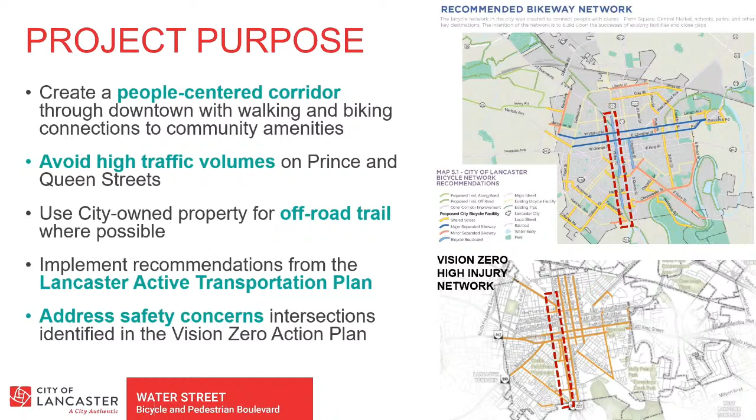So we're going to be talking a lot tonight about bicycle boulevards. How can Water Street be transformed into a bicycle boulevard? But first of all, what is a bicycle boulevard? It's basically a slower moving street where you keep traffic volumes pretty low. You keep them slow. Usually you want to be under 25 miles per hour, ideally 20 miles per hour. And bikers are intended to have more of a priority on that.

You're not taking away any vehicular travel lanes. You're not taking away parking. So the vehicles continue to use Water Street as they do today. However, they do so more slowly, and you really focus on creating safer crossings to facilitate those bicycle movements on the boulevard.

In addition to the traffic calming, a key part of bicycle boulevards is signage, right? You want to have signs that are alerting people that bicycles are going to be on the road, alerting people to crossings that are coming up, and then also using pavement markings. And you'll be able to see those on the plan views that are both here on the table and on the boards.

So the study area for the Water Street corridor is from Fairview Avenue to the north to Harrisburg Avenue to the south. Throughout the corridor, Water Street is typically 25 feet wide with two 9-foot travel lanes, one in each direction, and one parking lane on the west side of the street. The posted speed is 25 miles per hour. And as I noted, we do have 3 intersections on the corridor that were identified as high crash locations on the Vision Zero Action Plan.

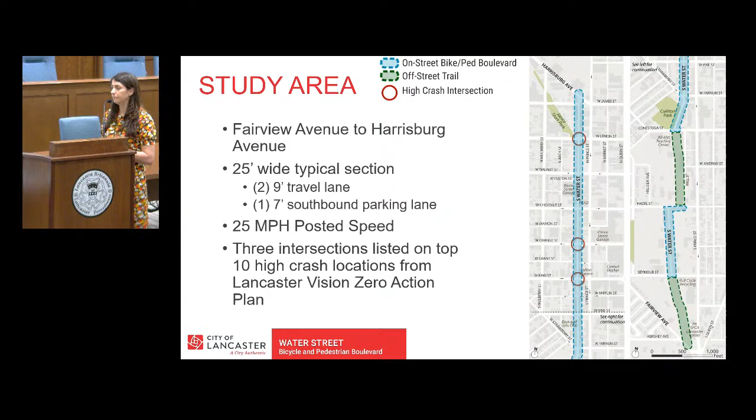A quick overview, as I mentioned, we already did a concept design and planning phase for this project. Some of you may have participated in some of the public meetings that we had as part of that concept design. So that was phase 1, and that took place from the winter of 2019 through the fall of 2019. We moved into phase 2, preliminary design, which is what we are presenting on here tonight, in fall of 2020, and we'll be continuing to work on preliminary design through summer of 2022.

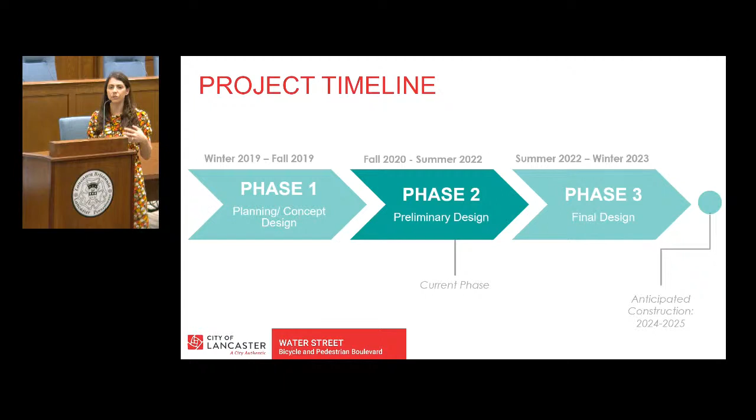At that point, we will switch into final design, where we go into even more detail on the designs that we're doing to prepare all of our construction plans, and we are aiming to go to construction of the project probably in 2024, with construction in 2024 and 2025.

For the project vision and goals, as I mentioned, we really want this to be a people-centered corridor where people of all ages and abilities can travel comfortably throughout the corridor. So that's for people walking, that's for people biking, and it's also creating safer conditions for vehicular traffic as well. Some of the goals that we want to achieve through implementation of this project is creating that low-speed environment, actually lowering the speed limit to 20 miles per hour instead of 25.

I mentioned the Vision Zero plan, and the goal of Vision Zero is to get to 0 traffic deaths. The biggest indicator of whether you're going to have a severe injury or a death from a traffic incident is speed. The lower the speeds are, the more likely that you are to be able to walk away from that. And that is why we want to keep speeds as low as possible on the Water Street corridor to create that safe, comfortable environment for all users.

We also want to increase the number of people walking and biking, reduce the number of crashes for all modes of travel, and we also want to look at ways to incorporate green infrastructure along the corridor. This would be similar to the green infrastructure that the city is already doing on corridors such as Mulberry and Charlotte.

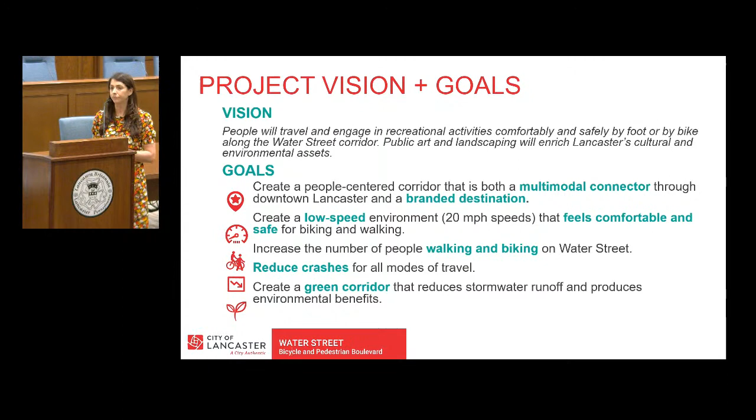Some of the key issues that we noted along the corridor during our existing conditions analysis is that it's a very constrained right-of-way, right? There's not extra space here in the road that you can put in a bike lane or anything like that. The lanes are already narrow, the parking lane is narrow, and so we have a limited amount of space to deal with.

Similarly with the sidewalks. In an ideal world, we'd have much wider sidewalks to facilitate pedestrian movement. However, the corridor itself is too constrained to widen out those sidewalks without impacting vehicular operations, which, as we know, this still needs to be a corridor that cars can travel in both directions and you still have your parking.

Throughout the corridor, we have a lack of signalized intersections and the crossings aren't overly well marked, so that can make it problematic for people crossing the street. There are also numerous driveways in areas that can create more conflicts. And especially in the southern part of the corridor, where we do have those sections where the road does not go through and we have trails, there are some light industrial uses in that area. So we need to think about how bicycle and pedestrian traffic is going to interact with those industrial uses.

Finally, similar to the industrial, we recognize that this is a corridor that trucks use. So any of the things that we're doing at the intersections along the corridor need to be able to accommodate truck turns. So that's something that we took into consideration during our design.

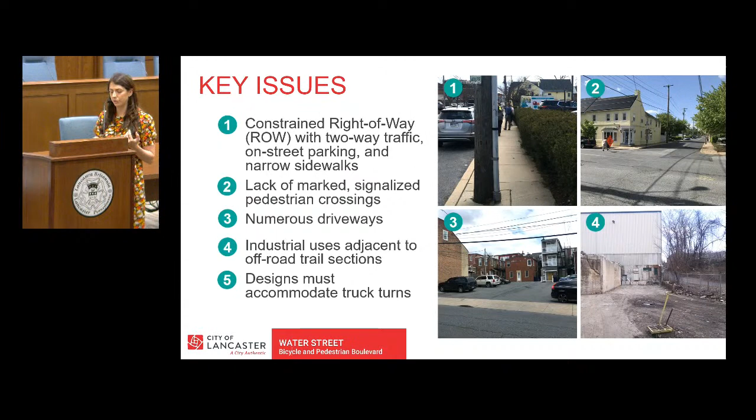As I mentioned, during phase one, we had a couple of public activities to try to get feedback and get input on the concept designs that we were considering. The first of these took place in May of 2019 at the Lancaster Open Streets event. That year, Open Streets was on the Water Street corridor, so I don't know if any of you came to our booth, but we had corridor plans laid out where we were asking people for input on what they'd like to see. We had a toolbox of the different treatments we were looking at and some of the concepts for intersection design.

We then had a public meeting in September of 2019, which took place at the Boys and Girls Club on the Water Street corridor, where we gave a presentation on the design and had boards and got some feedback there, and overall received very positive feedback on the design. Some of the things that we heard about were concerns about lighting and trail safety, and of course making sure that vehicular operations could continue on the corridor.

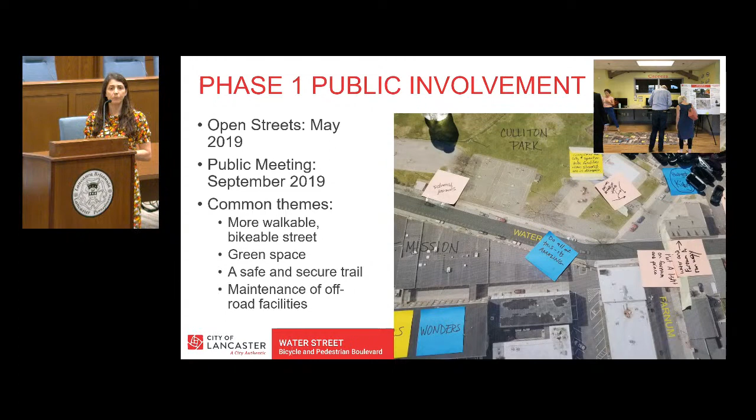What came out of phase one is we identified a toolkit of treatments. I'm going to go over these briefly right now because we're going to be discussing these concepts throughout the rest of the presentation. So as I noted, we recognize that the typical section of Water Street with its 2 lanes and its parking lanes needs to stay consistent in the design of the boulevard. So where we're looking at treatments mostly are at intersections. We're looking at things like high visibility crosswalks. It's going to make it safer for pedestrians to cross.

In some cases, we're looking at raised crosswalks to slow traffic down even more as they're making those crossings. We also have a location where we're looking at a raised intersection. That's where the entire intersection is raised up to sidewalk level. So the entire intersection almost serves as a speed hump and slows cars down as they're moving through the intersection.

We're also looking at curb bump outs. Curb bump outs basically take place wherever you have a parking lane at the corner where parking is illegal anyway because you can't park within 20 feet of the intersection. The sidewalk can then bump out into that lane, and that shortens the crossing distance. That makes it so much safer for pedestrians to cross because they have less amount of space if they're in the road making that crossing. Those curb bump outs also provide opportunities for the green infrastructure that I mentioned earlier, and we'll be showing you some images of what those can look like.

All the things that I just mentioned are things that are happening at intersections. On the corridor itself, in between intersections, we are looking at speed humps to slow traffic down. I mentioned that we want to keep things at that 20 miles per hour to keep it as safe as possible, so those are being installed as well.

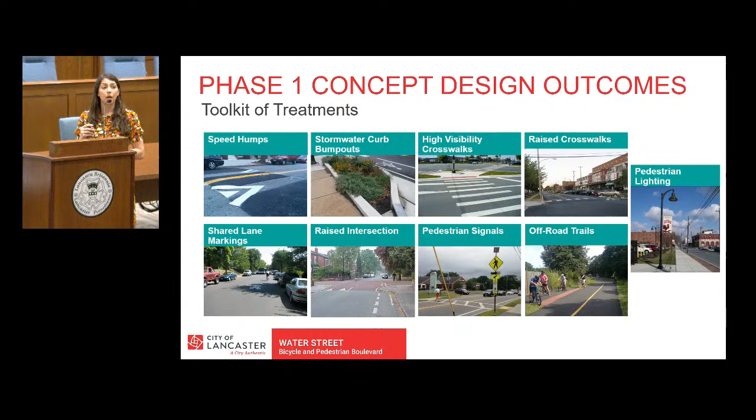And then the other thing that came out of concept design is we developed a series of intersection plans and renderings to give folks a sense of what this would look like. And I wanted to show these here because now that we're in preliminary design, we have very detailed designs at this point, but they don't look quite as pretty as the concept design ones. So I wanted to give you a sense of what those looked like at that time.

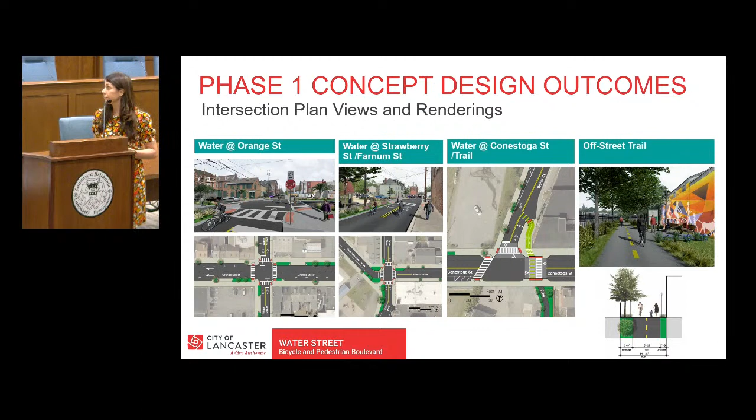We've since refined these drawings to make sure that they're buildable. They work with the utilities that are underground. They work with truck turning. But this gives you a sense of how the corridor was originally envisioned when we were in the concept design phase. So with that, I am going to hand it off to Eric and Anna to talk us through some updates on the environmental process for the project.

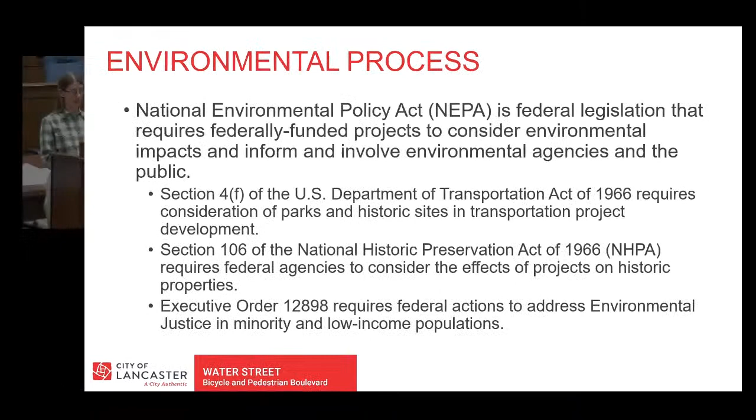Because this project does include federal funding, it falls under the National Environmental Policy Act, which is known as NEPA. And there are three particular components of that I'd like to speak about tonight. One of them is Section 4(f) of the U.S. Department of Transportation Act of 1966. This requires that parks and historic sites be considered in transportation project development.

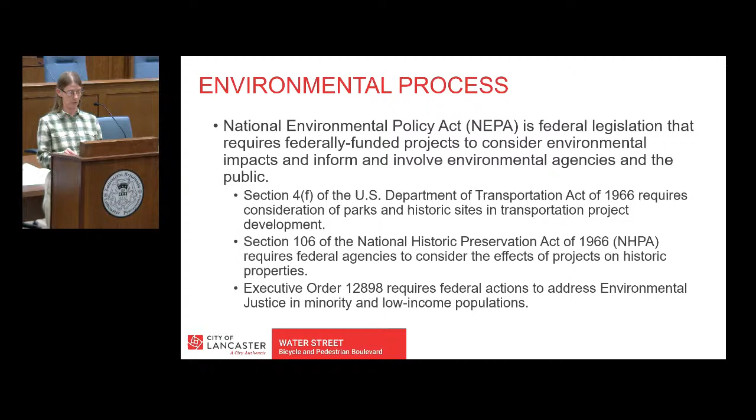There's also Section 106 of the National Historic Preservation Act of 1966, the NHPA. That requires that federal agencies consider the effects of projects on historic properties. There's a little bit of overlap between the two. There's also Executive Order 12898, which requires federal actions to address environmental justice in minority and low-income populations.

For parks, we have 3 parks in the project area. At the very northern end, we have Rotary Park. Approximately 1 block below that, we have Mayor Janice C. Stork Corridor Park. And then approximately halfway through, we have Culliton Park. A Section 4(f) de minimis finding may be needed for the work in the parks.

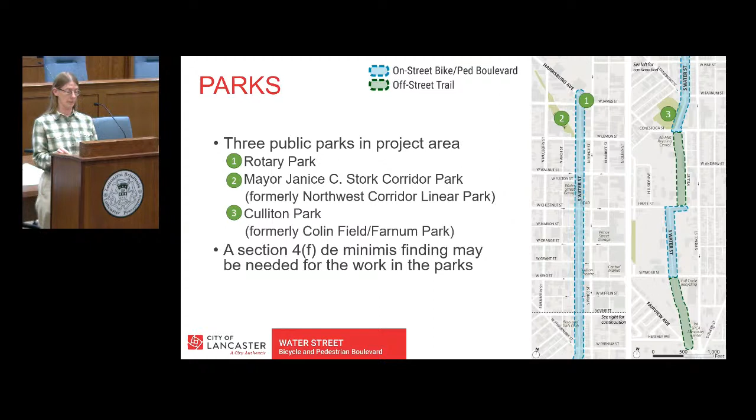For the Mayor Janice C. Stork Corridor Park, we have also approximately 215 square feet of temporary impact. There will be a replacement of the sidewalk and the apron at the park entrance that is shown in the photograph. In the general area, we're planning curb bulb-outs, curb ramps, and stormwater management. Temporary impact to be approximately 1 month, and other access to the park will remain open. The park itself will, of course, also remain open.

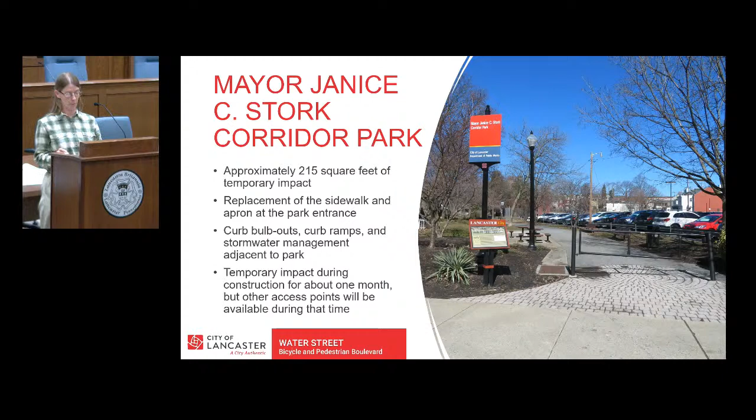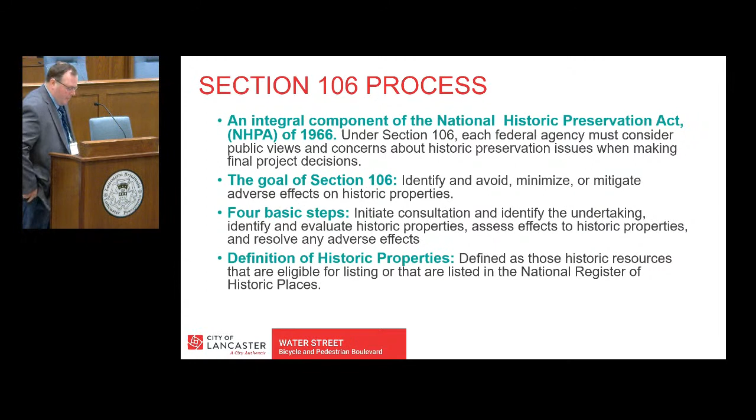Good turnout this evening. Again, we're working on the environmental clearance for this project. And because there's federal funding involved with that, we have to comply with NEPA, as Anna said. And as you're aware, we're within the Lancaster City Historic District, which is listed on the National Register of Historic Places. So the entire 1.6 mile trail is within that project area, and we basically have to assess the impacts to that. So the goal of that is to identify what's there. We know the resources there, and then avoid impacts to that resource. And the project team has done a really good job to do that for this corridor.

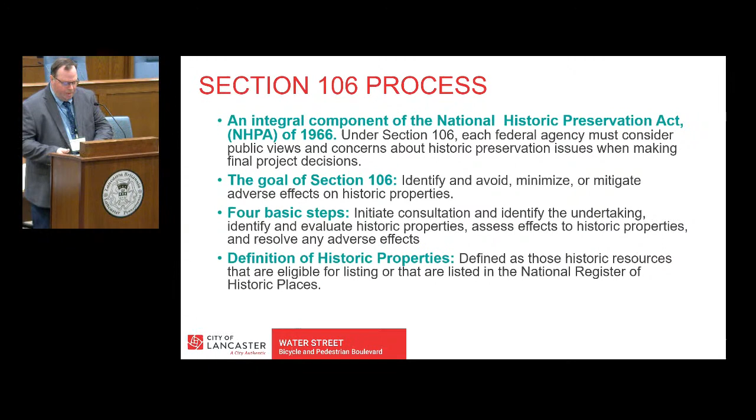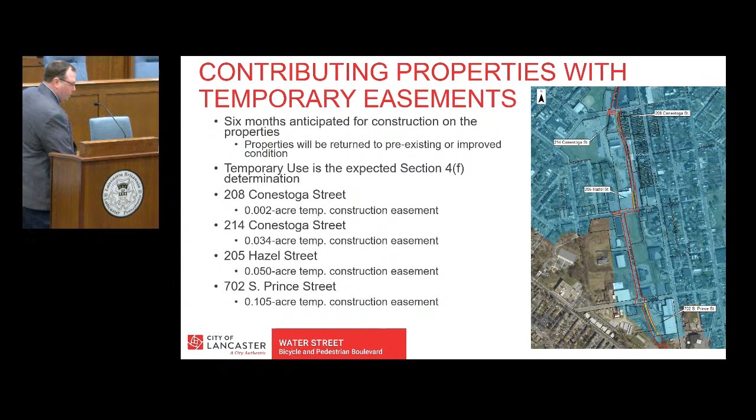And there's properties within the historic district that are listed on the National Register of Historic Places, and we identify those as either contributing or non-contributing to the historic district. So there's 4 properties within the historic district that we're having temporary construction easements to. They are listed here in front of us, being the 208 Conestoga Street, the 214 Conestoga Street, the 205 Hazel Street properties, and the 702 South Prince Street properties.

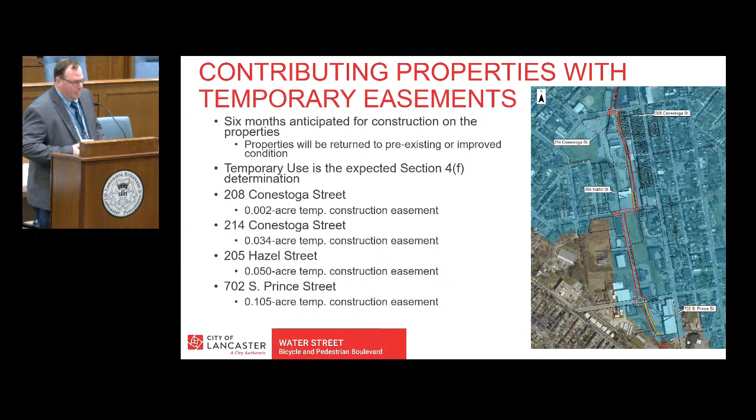We can go over the details with exactly what we're doing there when we're going through the boards this evening. But basically, there'll be temporary construction easements on there for the contractor to access the curb ramp improvements during construction. So, important to note is that this project will have no effect on the historic properties. So, that's basically what we're looking to achieve for cultural clearance for the project.

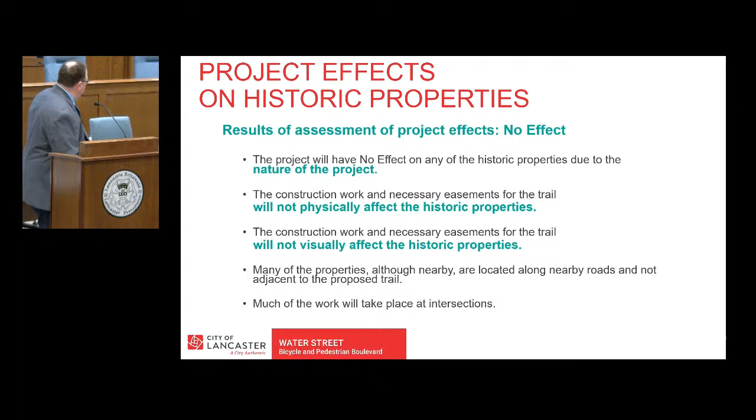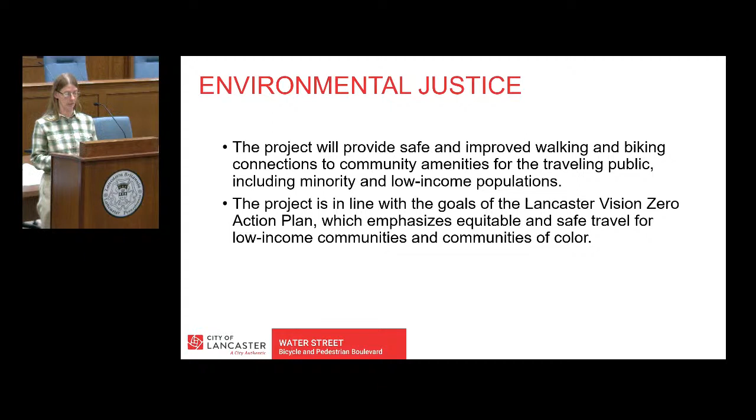My turn again, thank you.

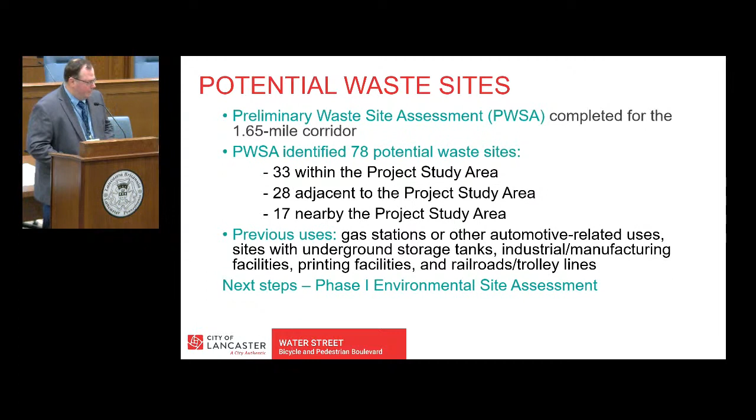All right, thank you, Eric and Anna. We call them the Environmental Dream Team.

All right, so I know that I already talked a little bit about some of the components of the corridor that were identified during the concept design phase. And right now, I wanted to talk to you about where the design stands in preliminary design, and just to give you an update on what exactly we are looking at.

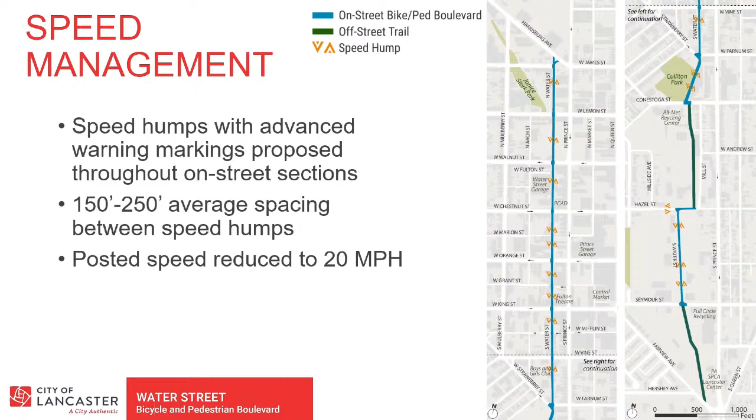So I mentioned a lot about speed and trying to keep speed low. So speed humps will be installed throughout the corridor. Typically, we are looking for these speed humps to be installed about every 150 to 250 feet or so. We've found that spacing will actually ensure that speed compliance happens. If you put the speed humps too far apart, people will just speed up in between them. So we keep them close enough together to keep those speeds low. We also will be reposting the speed limit from 25 miles per hour to 20 miles per hour along the corridor.

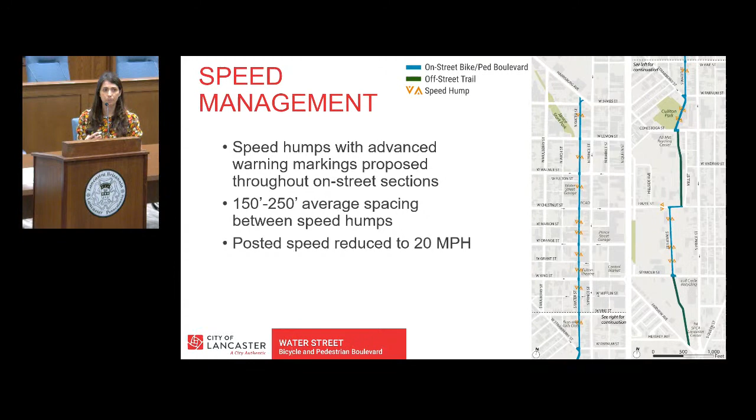We're also looking at things like bicycle crossings where since we know we're going to have bicycle traffic along the corridor, we want to mark in those bicycle crossings and put in those conflict markings so that vehicles and pedestrians are aware the bicycles are going to be there, as well as facilitating movements for the cyclists that are going from the Water Street corridor to other intersecting bicycle facilities, such as the existing facility on Walnut Street and the proposed bicycle facility on Lemon Street.

At 3 intersections, we have what we're calling enhanced trail crossings. These are locations where we're going to switch from on-road to off-road. So the majority of the corridor, as I mentioned, is going to be a bicycle boulevard. This is on the existing Water Street that you have today, and this is where the typical street section remains the same, with 2 lanes in each direction and 1 lane of parking.

For the 2 sections where Water Street does not extend through, so there's a gap in Water Street between Conestoga and Hazel, and there's also a gap between Seymour and Hershey. In those 2 areas where the city already owns a right-of-way, we will have an off-road trail in those sections. And we want to make sure that where bikes and pedestrians are moving in between the on-road and the off-road, that we have safe transitions for them.

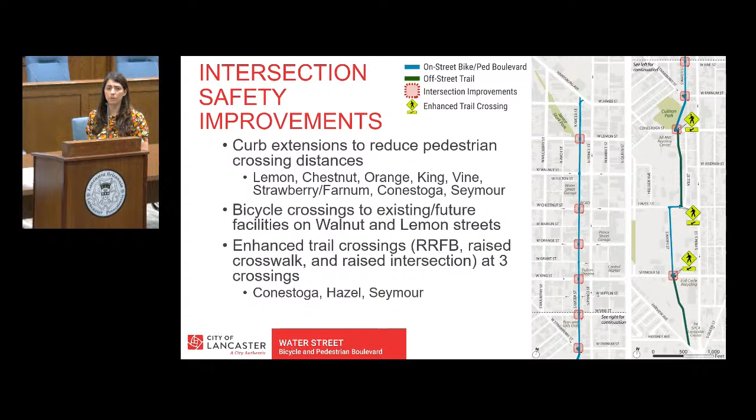So I just want to go through a couple conditions along the corridor. We don't have every intersection on here in the presentation, but if you want to look in any more detail at what's happening at each intersection, I encourage you to come and look at the plan views that we have on the table here, and the design team can answer any questions that you have.

First, I want to talk a little bit about what's happening at the northern terminus of the corridor with connections to James Street and Prince Street. So here on the plan view, you can see that we have bicycle markings that are connecting cyclists that are moving northbound on Water Street to connect onto James.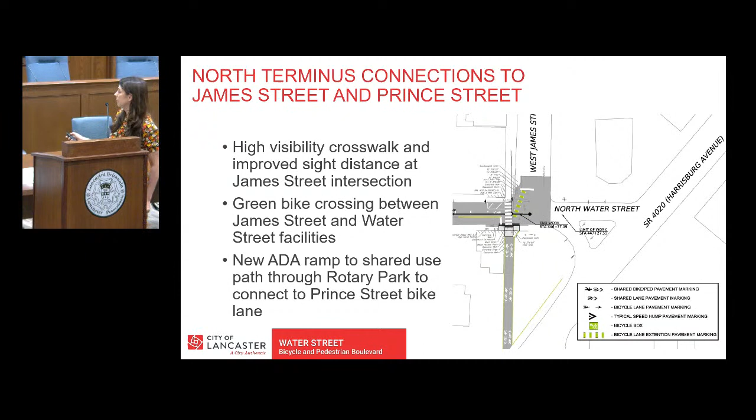We also are showing we're looking into doing pavement markings here on the side path that's going to connect cyclists and pedestrians going from Water Street over to the existing bike lanes on Prince Street, and this will also include a new ADA compliant ramp right here at the corner of Water Street. And we're also looking at a high visibility crosswalk at this crossing here.

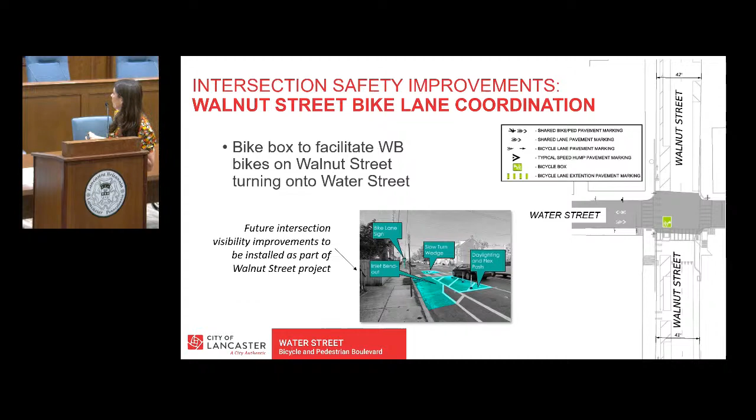The next intersection I want to talk about is Walnut Street. This is where the Water Street corridor will be existing with an existing bicycle facility. This is where we have a parking separated bike lane that's traveling in the westbound connection. And in this spot, most of the intersection treatments have already been constructed here, but we will be adding a green bike box that will allow cyclists that are traveling west on Walnut Street to wait here in the bike box before turning right to head north on the Water Street corridor.

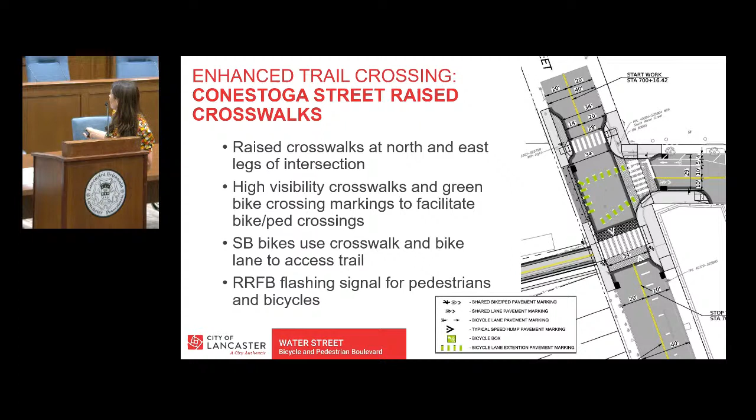If you're heading in the northbound direction, you cross at the raised intersection here, and for a cyclist, at some point, come down, use the conflict markings, and get onto the road in the northbound direction.

The other treatment that we're doing at this intersection is called a rectangular rapid flashing beacon, or an RRFB, which is a very fancy way of saying that is a signal that basically when a bicyclist or a pedestrian is detected, the signal will flash, alerting cars that they need to stop for the pedestrian or cyclist that is crossing Conestoga here to once again make that crossing as safe as possible.

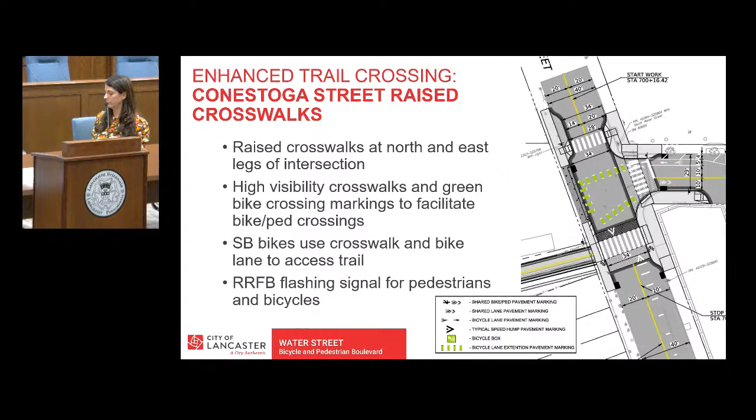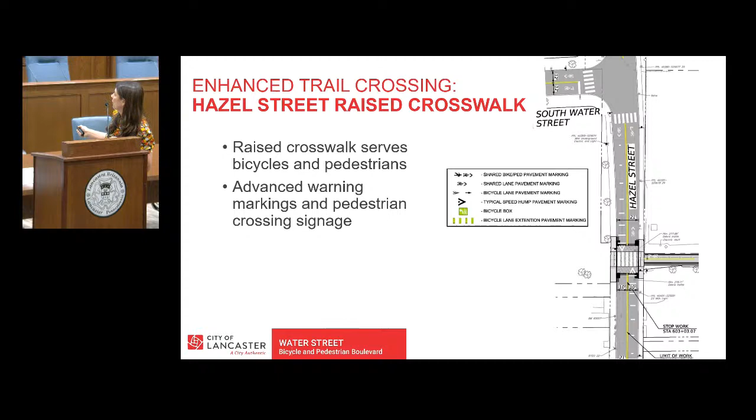Another intersection where we are doing this transition is at Hazel. So here to the north, the trail is coming down and basically dead-ending into Hazel. At Hazel, we have a raised crosswalk. So again, this is almost acting as a speed hump on Hazel. It's going to slow the traffic down as it approaches the crosswalk, makes that crosswalk more visible. And at this point, bikes would continue on road on Hazel Street and then turn onto Water Street, where Water Street extends between Hazel and Seymour.

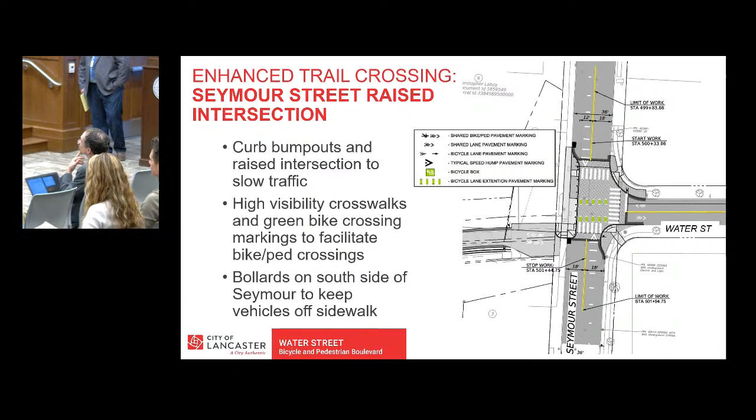So southbound bikes would follow this path here, cross the green conflict zones. At this point, they would be on the sidewalk level and they'd be able to access the trail. Similarly, northbound bikes are on the trail, so then they're all raised up. They use their green conflict marking here, and then they're on the roadway.

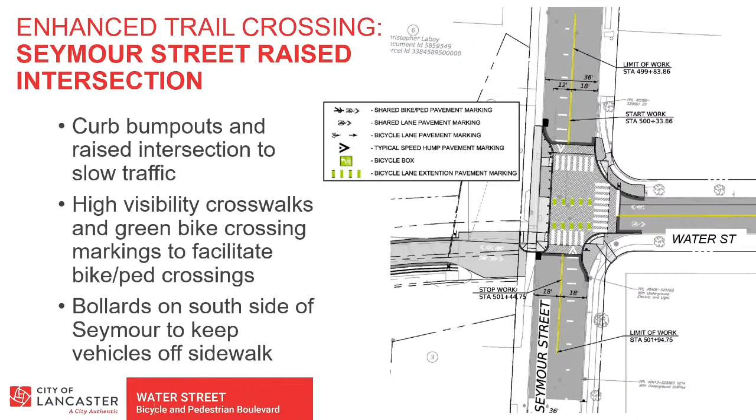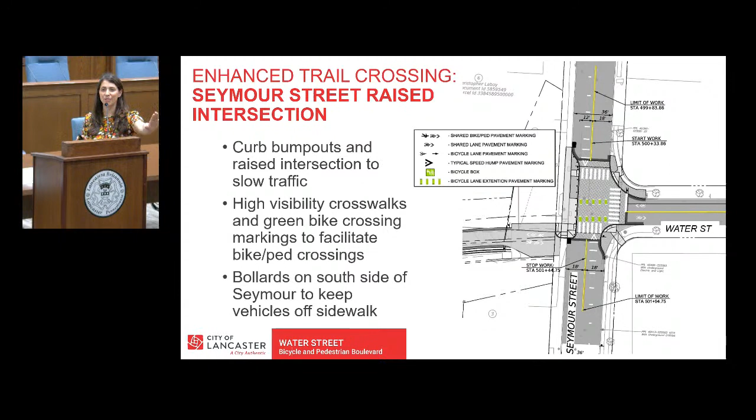In these areas, you can see these black dots here are denoting bollards that basically keep vehicles from going up on the sidewalk in that section. So if you have the cars up at sidewalk level, you want to make sure that they are not accessing the sidewalk. I know that there's a lot going on in these plan views. I really encourage you to check out this board back here after the presentation so you can look at those in more detail, and the design team can answer any questions that you have.

So with that, I'm going to hand it over to Sandy to talk a little bit about green infrastructure, both on road and on the trail.

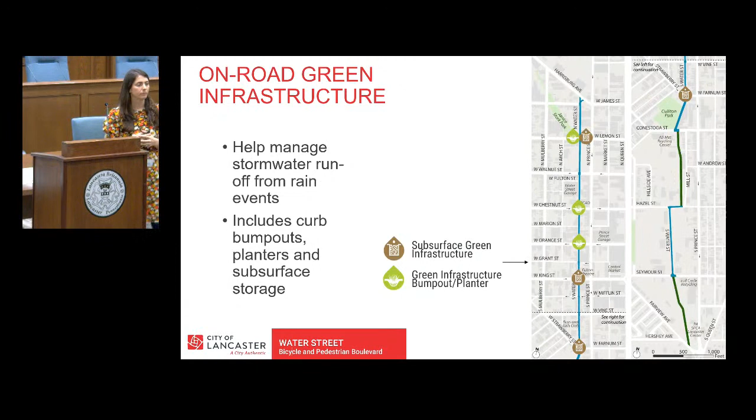Thank you, everyone, for coming out on a day like today. I'm glad to talk about stormwater when it's really, really coming down.

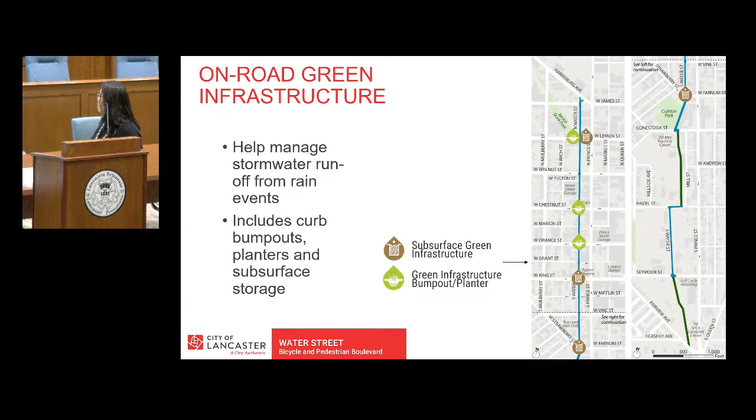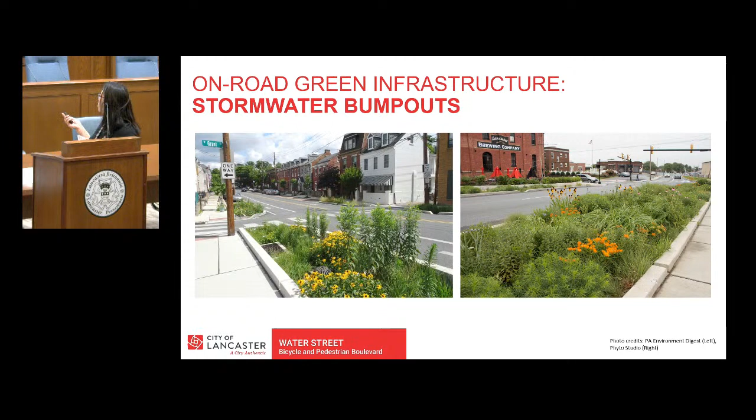So as Laura said, we've integrated stormwater infrastructure with the overall infrastructure improvements, and a lot of the systems are integrated at the curb extensions and bump outs. Most of you are probably extremely familiar with the bump outs that you see throughout the city. They essentially work by just filtering water that's coming in from the street. And again, a lot of these systems are just managing runoff on the street. So there's a couple of examples of bump outs in the city.

And in addition to the bump outs, this is another typology that we are trying to design. And again, they're stormwater planters. And the way these things are built is, essentially there's a surface expression, which is essentially the vegetated system, and then underneath there is a stone storage. Oh, I have to be really close. Okay.

So both the bump outs and the planters have a surface expression, which is the vegetated system that you see on the screen here, and a subsurface detention system, which is essentially either loose stones or, for lack of a better word, almost like milk crates. And the way they function is that they temporarily hold back stormwater that comes into the system, and then they release it slowly back into the storm sewer system.

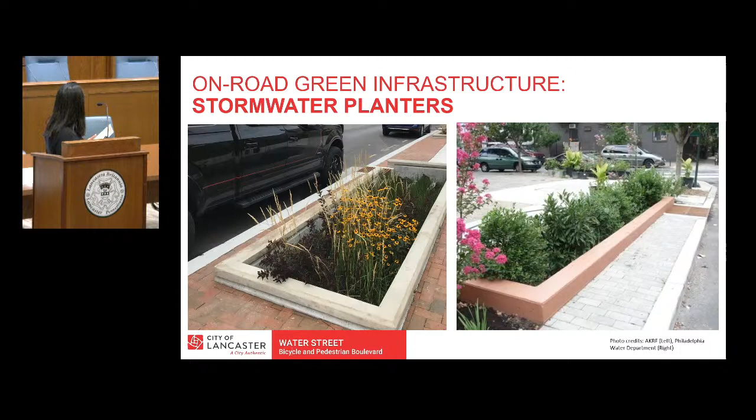And essentially, they function by not overwhelming any of the combined sewer system in the city. And for a city like Lancaster, where the stormwater infrastructure is aging, anything that we can do to aid that, I think, is a positive thing.

Again, you probably have seen the bump outs in the city, and there's a wide variety of plant materials that we can select from that are native to, I guess, sort of the eastern United States, and they also provide ancillary benefits like habitat for pollinators. And first and foremost, they're really beautiful to look at.

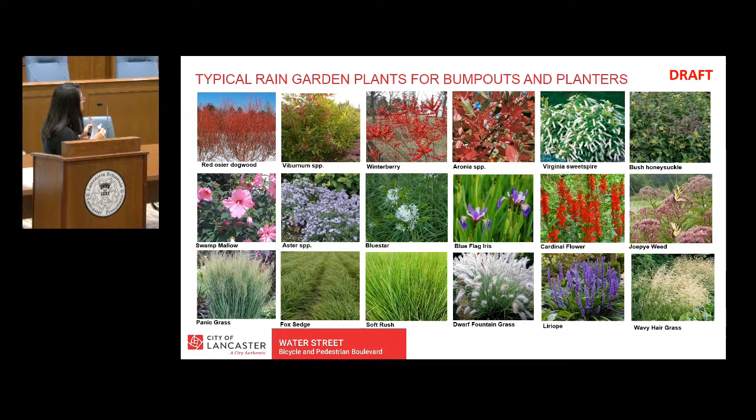But we're all mindful that these are living things that need to be maintained. So there's always that sort of balance between making things that are lush and beautiful, and at the same time, that can persistently look good. So that's sort of the dynamic that I, as a landscape architect, work with. And I want to bring Wayne to talk about the off-road trail sections, and specifically around the retaining wall that will be at Conestoga Street.

Thank you, Sandy. Wayne Martin, pleasure to be here. So I want to speak specifically on two components of this off-road trail portion. Most of what you heard was the on-street concepts, and then you heard a little bit about some off-road portions in the southern end of the Water Street divide. Those will be exclusive for bikes and peds, except for one little section where it's a shared use with a driveway facility. But there's two components, right?

Grade was one of the challenges we had to deal with. So how do you handle those grades? Retaining walls, obviously. Retaining walls can be very expensive. We're using your taxpayer dollars, so we have to come up with some feasible alternatives. So we did study two different alternatives for that retaining wall design, one being a gravity retaining wall, and the other being a modular block retaining wall.

Basically retaining walls are going to do two things. One, they're going to prevent sliding. They're going to prevent overturning. Modular block is approved by PennDOT on PennDOT highways. That was the selected alternative based on price and site constraints. The way it'll be constructed, these modular blocks don't use mortar like a mortar wall. They interlock, so they're prefabricated at a plant, hauled to the site, set in place.

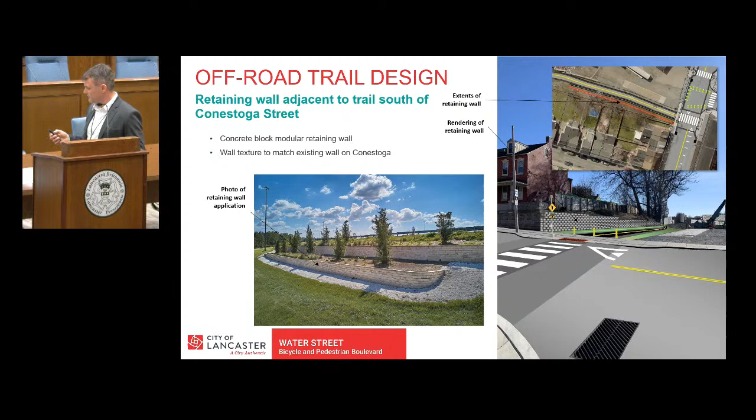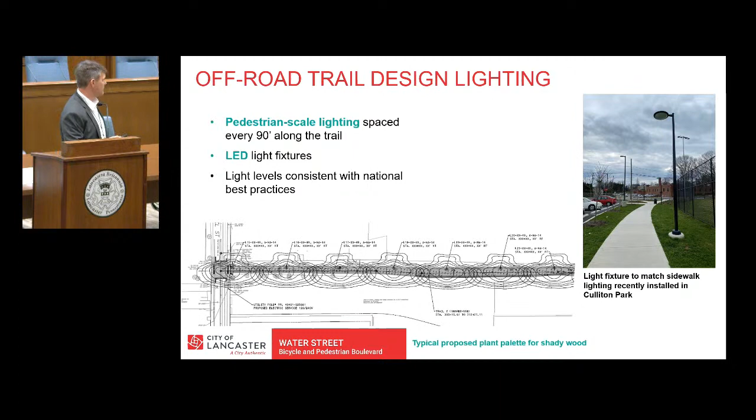The other thing I wanted to mention was the lighting design. The off-road trail portions will be lit. We used park level lighting, pedestrian level lighting, LED lights. The fixture that was selected is based upon a fixture used in the City of Lancaster in some parks. Not much to say about it. It will be illuminated to the national best practices. And now I'll turn it back over to Sandy.

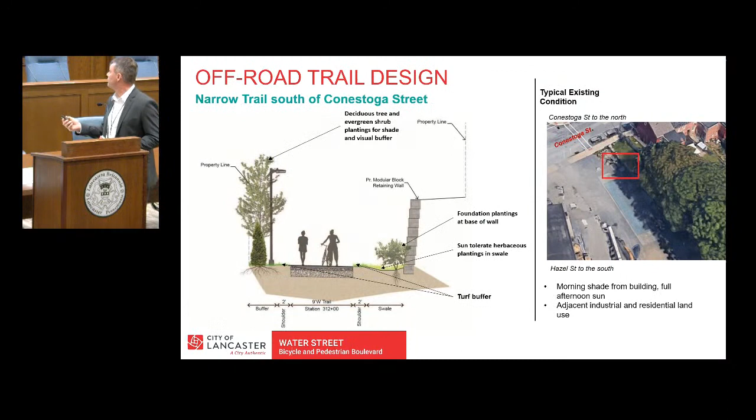So as Wayne said, the North Water Street trail, which is all the on-road section, is sort of governed by the street geometry, right? You have your intersections, whereas once you start going off-street, it's a different character. Sorry. So once you're on the off-trail sections, which there's actually 2 segments, it becomes a different experience altogether.

And so within this off-road section here, there's the wall that Wayne was talking about, as well as the landscaping and the stormwater. Most of the stormwater will be managed by a passive system. So basically, it's just a swale system that's running alongside one side of the trail.

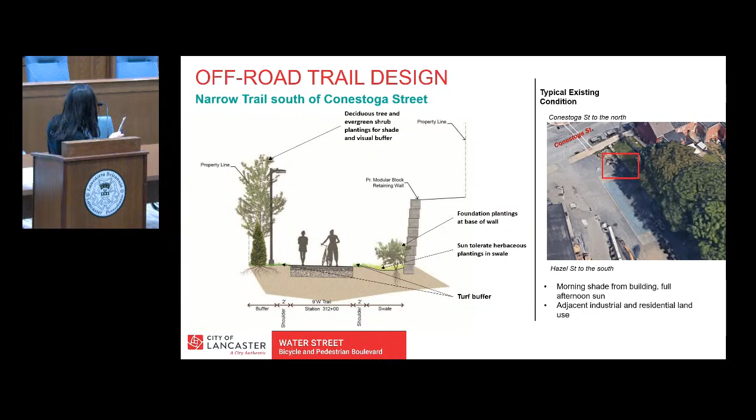And again, one of the things that we want to do in there is, we understand that it's a light industrial area. We do want to have some vegetation that will provide shade, and at the same time provide some screening. So these are some more columnar species of trees that we can possibly use to provide that screening, as well as to provide shade and habitat.

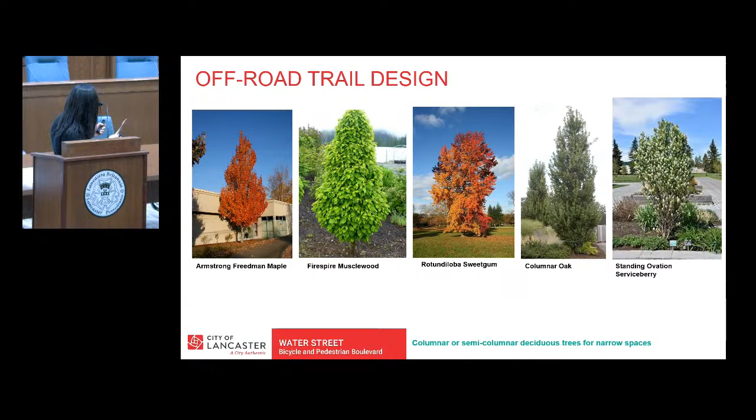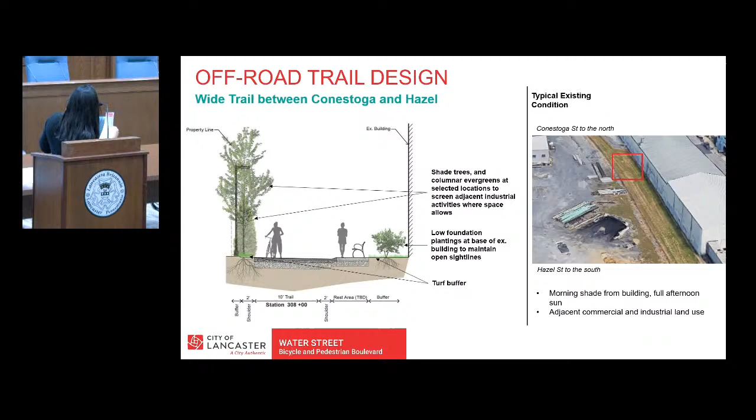So again, looking at different sections of the trail, and this is sort of between Hazel and Conestoga. I guess if you're coming down, it's to the left side. It's sort of a light industrial area. Again, we want to provide screening and possibly some rest areas as well through there. Again, more screening plants.

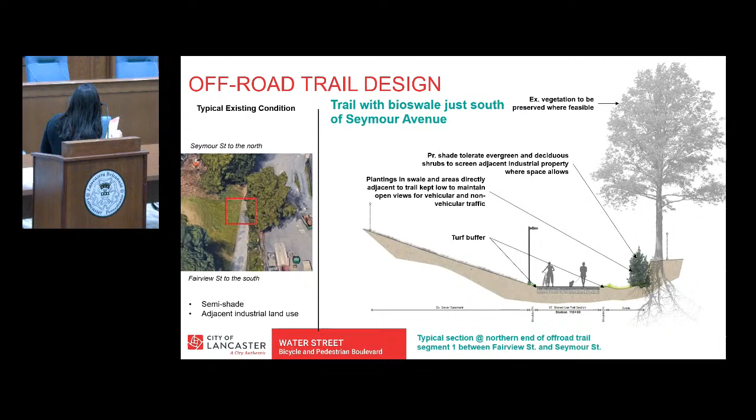And this is closer to Seymour, where I believe this is sort of like a shared use trail in this section. Just different types of vegetation to sort of enhance that trail experience.

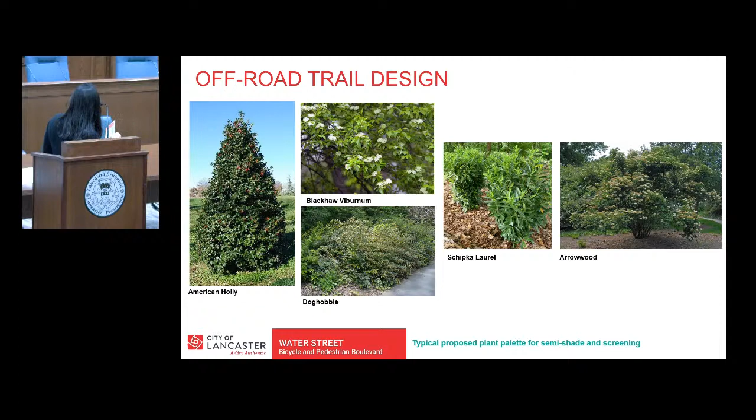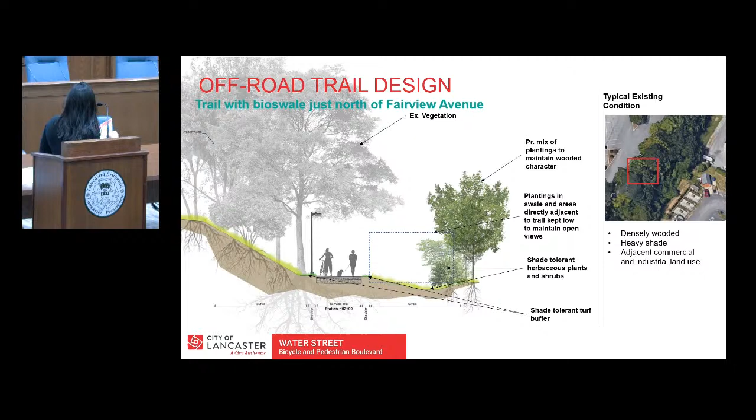And lastly, this is really when you're farther down, the south end of the trail, closer to Fairview. I believe there is the SPCA site that's close by. So again, it's making that balance between screening and still giving it a sense of place. Again, there's existing vegetation and cover all along the site that the plantings will have to respond to. So, again, more plants.

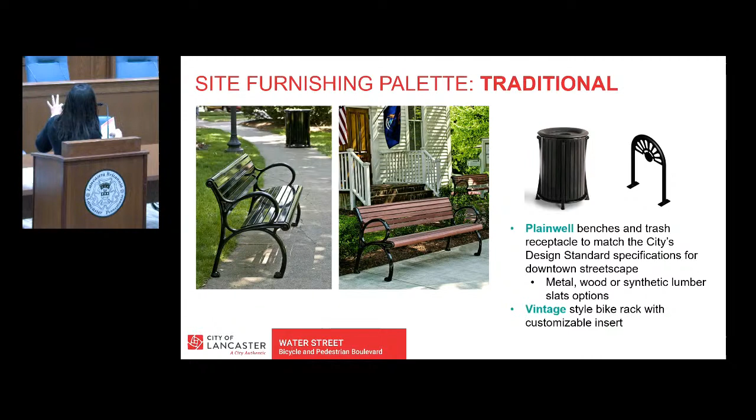And lastly, scattered throughout the site, we want to present opportunities for people to rest and to experience different vantage points. And again, there's just different options for furnishings. The style that you see here is pretty similar to what the city of Lancaster has as their standard. But that being said, it's not to say that we have to stick to one vernacular. We can introduce new styles, especially because the city is in transition.

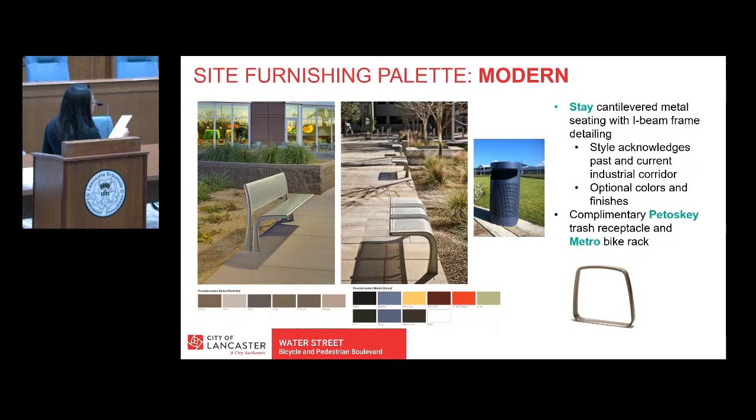We want to maybe give the corridor a different signature. And one of the ways of doing that is picking these select furnishings that really put an imprimatur on the overall landscape.

And lastly, Lancaster has an amazing industrial heritage. I think we want to maybe honor that. And one of the ways that we could do that is either introducing furnishings that respond to the local architecture and/or reusing some of the found industrial materials, and in the process, possibly save some taxpayer monies. So, I think you'll have an opportunity to vote on which styles you prefer. So, yep.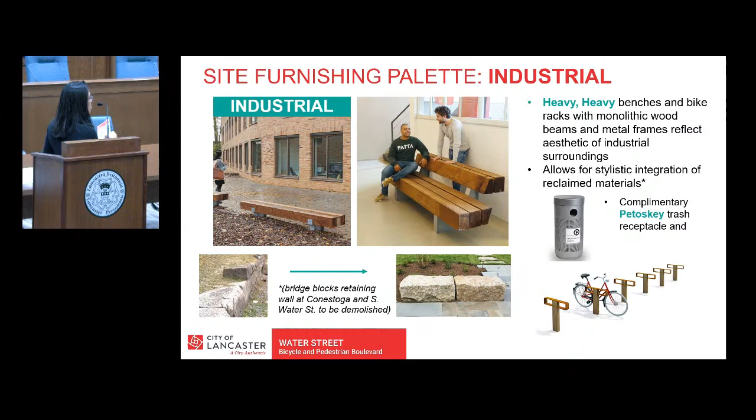Really quick, as I mentioned, we do have an opportunity here if you want to use your phones to vote. You also have an opportunity to do it on the board in the back. It's really up to you, but as Sandy mentioned, at this point, we haven't picked a design yet for the site furnishings, and we're looking for feedback from you on what you think would be most appropriate for the corridor. Is it something more on the traditional side? Is it switching it up to go to modern? Or is it doing something to incorporate that industrial heritage?

So if you would like to do it online, you can either text LAURAA161 to the number 22333, or you can go to the website. If you do it right now, it'll show up on the screen in real time. And if you would prefer, we also have dots available, and you can vote on the preferred location at the board in the back. So far, modern is winning.

Come on, that means that other people need to vote. I have no doubt about it. Yes. That's fine. The dots are at the boards, and you will have time after this to do so. So, we're in a dead heat now. I don't know what's gonna win.

And so these are the types of things that we are going to be determining in the final design phase, which is one of the reasons why this is a great time in the design process to start to get some of this feedback. During concept design, we got some really great feedback on what people wanted to see along the corridor. We were able to incorporate that into preliminary design, and the types of things we hear tonight can also inform final design.

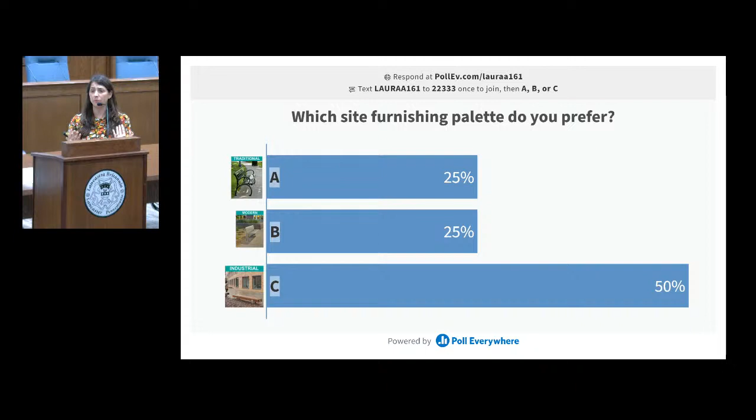All right, so far, industrial is looking good. We'll have to see how it all shakes out. This voting will also be available on the Engage website, and as I said, at the boards, we'll be compiling all of that together and determining which one of these styles. The examples, images that we showed tonight are all examples, but we'll be using those to kind of guide our decision making as we pick the specific furnishings.

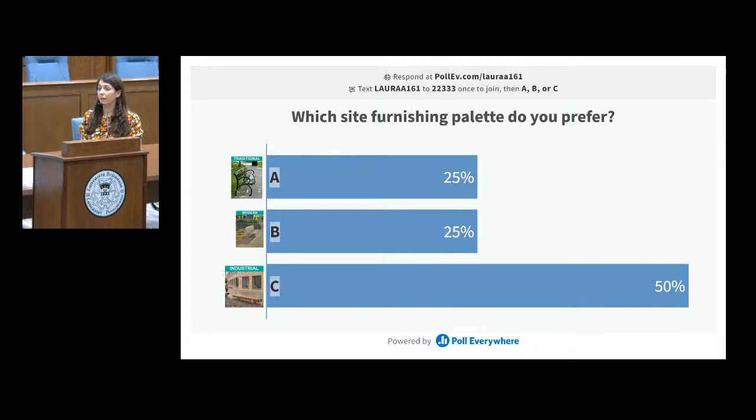And the final thing I wanted to talk about tonight is not something that we are currently designing right now, but something that we wanted to get your feedback on about opportunities to incorporate public art along the corridor. So we recognize that a lot of things that we've been talking about here tonight are very focused on how we can get transportation infrastructure in the ground in the next couple of years. But this corridor also provides an opportunity for placemaking improvements, and how do we make this the type of corridor that people really want to gravitate towards, to spend some extra time on, to celebrate the heritage of the stream that used to flow through there.

So public art is something that the city will be considering in future phases of the project. And we wanted to use this opportunity tonight to get your feedback on some of the initial ideas that have been developed by a public artist, Stacy Levy. So all the images that I'm going to be showing here tonight have been developed by Stacy. And just wanted to get your feedback on what is speaking to you and what you think some of the key opportunities along the corridor might be.

So some of the potential locations that we can think about doing public art, one is on the sidewalks themselves. Literally paint or different types of treatments embedded into the sidewalk that will help guide you down the path of the sidewalk. Similarly, we can do those types of treatments on the trail surface itself. There's also things that we can do at the intersections, things in curb bump outs, things that we can do in the green infrastructure areas. Another location are trail bioswales.

So as Sandy mentioned, for the trail itself, some of the stormwater will be managed underneath the trail, and some of it will be managed adjacent to the trail in a swale. So that's a location that we can think about doing public art. And then the retaining wall is another spot, those two retaining walls that we discussed. And then finally, the trail shoulder. So basically that spot right next to the trail.

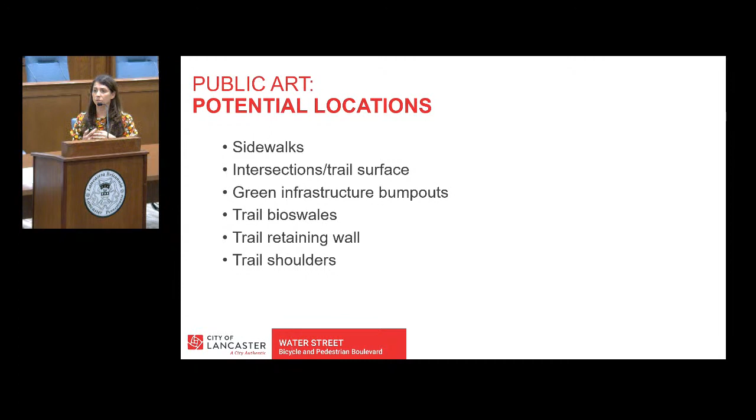And our design team worked closely with Stacy to identify what types of spots could be available. And all the images I'm going to show, she was trying to incorporate as much as possible the theme of water and some of the industrial heritage of the Water Street corridor into her designs. So just some images to give you a sense. Once again, these are all ideas of what could be possible. One is using glass insets in the sidewalk itself that can help guide you down the path, let you know that you're in a special place.

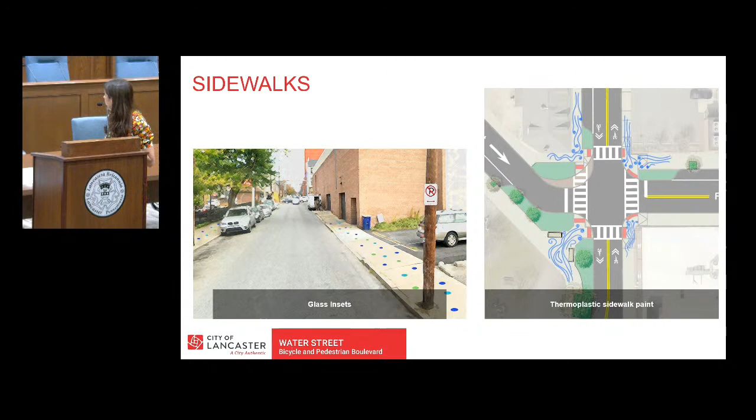Also, thermoplastic sidewalk paint can be used at the intersection. So Stacy overlaid one of the intersection redesigns of Strawberry and Farnum where we're showing bump outs and is adding this thermoplastic paint to the sidewalk itself to once again let you know that you are in a special place. And if you start thinking about doing these types of treatments in a rhythm along the corridor, right, every time you have a bump out, you do a certain thing. Every time you have a bioswale, every time you're in a certain spot on the trail, it really gives people a rhythm as they're moving through the space and lets them know that they're somewhere special.

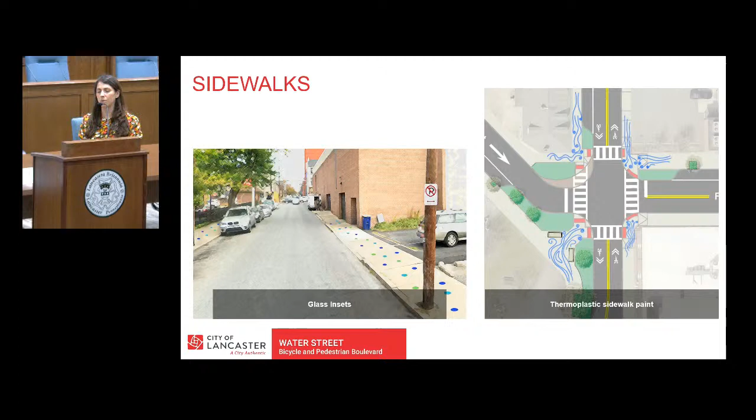Similarly, she wanted to think about how we could map different flows of water. If we think about where water is just flowing across the street, where it's being conveyed in pipes that might be happening underneath the roadway, where it's infiltrating, so where we have a bioswale and we know that the water is being infiltrated through, and where it's being stored. So the spots where we're holding the water underneath the intersection and using different treatments on the sidewalk itself to alert people to what's happening underground. So often we hide our infrastructure. This is kind of an opportunity to try to shed some light on what's happening underneath the ground.

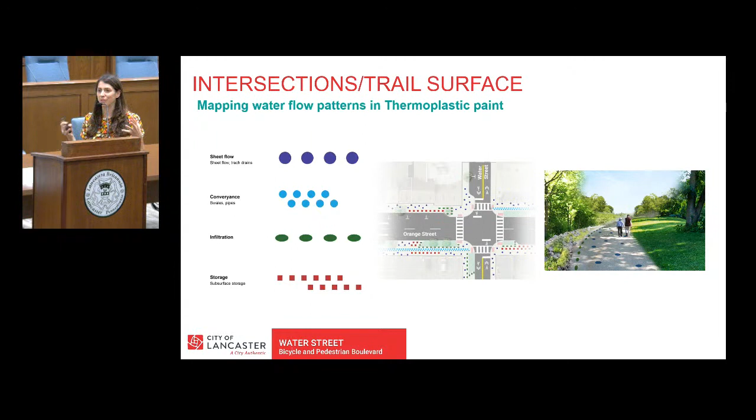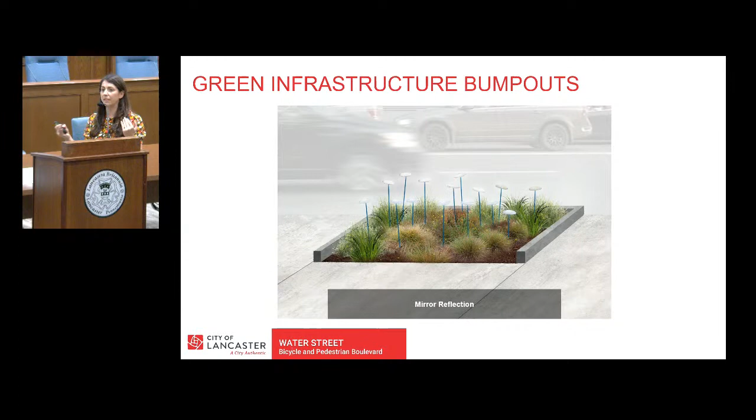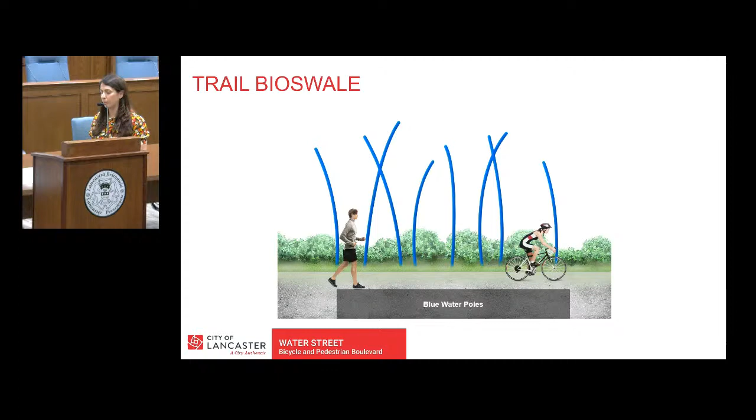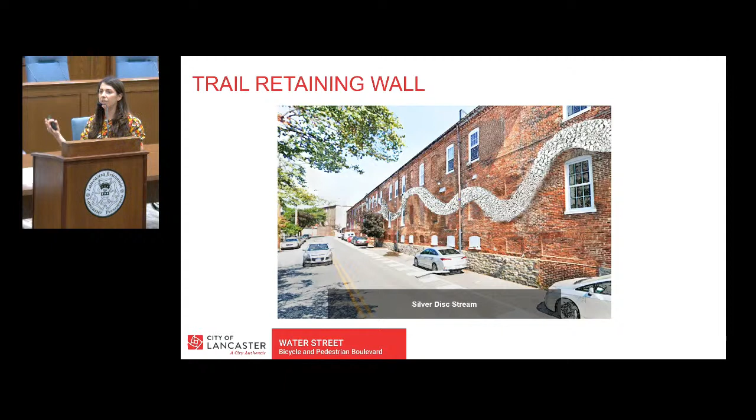I mentioned we'll have these trail bioswales that are running adjacent to the trail itself, so doing some sort of vertical treatment within there. Blue water poles that can be interspersed again with those plantings. Thinking about the retaining wall, Stacy had mocked this up on an existing wall, but the 2 retaining walls that we have would also be spots that we could think about in future phases of the project, installing something like this silver disc stream that's giving you an idea of water, but it's happening on the wall itself.

And then these are a couple ideas that could happen in the trail shoulders. These are also spots that can help to provide some shade along the trail while also bringing back that idea of water and celebrating the water on the corridor. So once again, there is a board that talks about these different public art ideas. We are asking you to vote on some of the ones that you think are most interesting.

We also have comment cards, which are available both at the sign-in sheet and over by the public art board, where we're asking you to mark up on the map where you think that you'd be most interested in seeing public art. I mentioned some of the locations where it could be done, but if you think there's any spots along the corridor that are very special that you think really deserve extra public art there, we're looking for feedback there, and really any feedback that you have on the public art ideas.

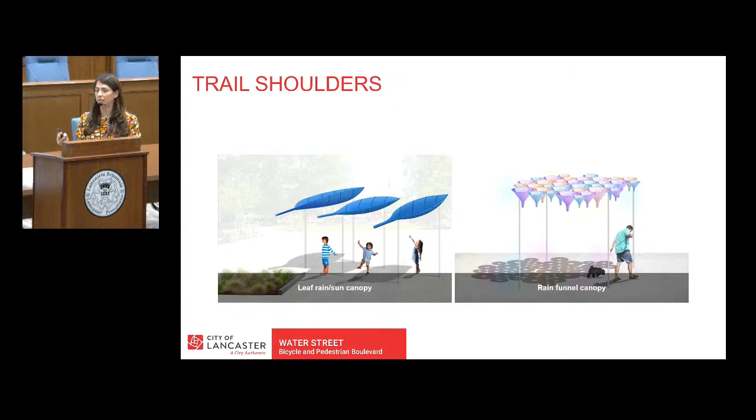At this point, we're still in very preliminary phases of discussing these. Our design team has made sure that our designs can be installed and would not preclude future public art from coming in, so this is a great idea to get some of your ideas out there.

So with that, this concludes the formal presentation portion of the night. I am going to bring the rest of the design team up for some question and answer. I'm sure you all have some questions that you'd like answered. And just a reminder that here we are in preliminary design, about to move into final design with a goal of construction in 2024 and 2025.

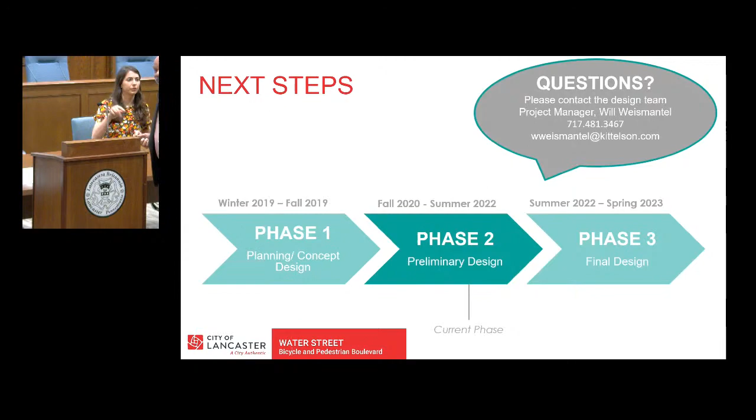Yep. So thank you again. I'll be emceeing or facilitating receiving the questions, and the first question came from over here. Mike, please. Hold on a second. Is there a traveling mic? No, unfortunately not. Are you able to come up? Well, it's a... If you come up to the mic, then it gets recorded because this is a recorded public meeting.

Thank you. I was wondering what the total cost of this whole project will be per year. The initial cost and then what the maintenance costs will be per year for the next 10 years. Number 2 question, I'd like to know how many crashes and deaths are on these streets now. We were presented with this crash and death concept. So I'd like to know how many deaths and crashes have been on here per year for the last previous 5 years. How much of a threat is that?

Okay, those are two questions. I have more. Okay, hold on a second, and I would like to be able to have other people ask questions as well. Okay. Cindy, if I could have you come up briefly.